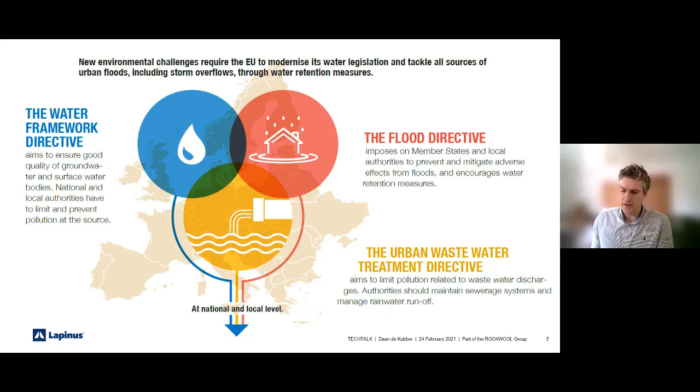So all in all, this framework of European legislation aims, for one, to make sure that water gets cleaner and cleaner, specifically looking at the groundwater and the surface water. Secondly, getting these waters cleaner requires preventing overflows from the sewer system towards the environment. And thirdly, you can prevent these overflows of the sewer system by preventing rainwater from coming into the dirty water sewer. So these three legislations give a very good framework of how we can handle this problem.

So how big is the problem? If I look at Denmark, then for sure there are a lot of overflows of the sewer systems. This map on the right is made with data from the Folketinget. It was published last year; I believe it's data from 2019. And I know the map is very much disputed because it's based on calculations and not on actual measurements of overflows. But it does indicate that the number of overflows is very substantial, and it's throughout the whole country. Maybe concentrated in Copenhagen if I look at the colors, but the problem basically is everywhere.

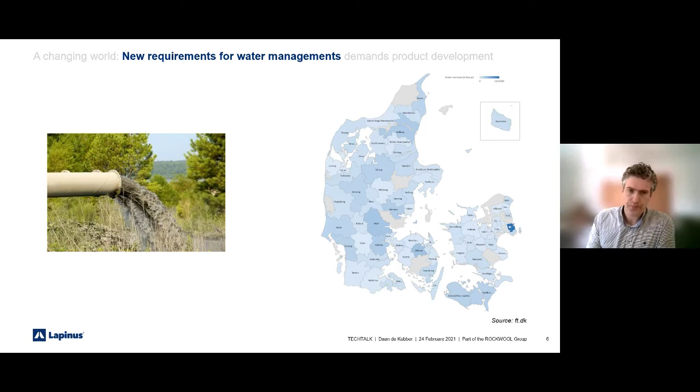So what should we do? One solution that has been traditionally used is to install pipes, big pipes, sewer pipes to capture all the dirt water and the rainwater, and then bring it to the wastewater treatment plant and get rid of it.

But we see with the bigger rains that you would need even bigger pipes than you already have. And then if you install a big pipe in one street, then the water going to the next street will be even more, so you need an even bigger pipe there. And it's a cascade of problems, and you would need ever bigger pipes.

This is both very expensive, almost prohibitively expensive, but next to that, you would also throw out all the water that you very well need inside the cities for the urban heat island effect, but also for the too little water problem, which can give in the end soil subsidence.

So we preach more to keep the water local, the rainwater local, capture it into systems, buffers, creeks, bodies, all kinds of SUDS systems. But then also we need to clean that water before it's sent to a recipient to make sure that we fulfill these demands or start fulfilling the demands of chemical and ecological quality.

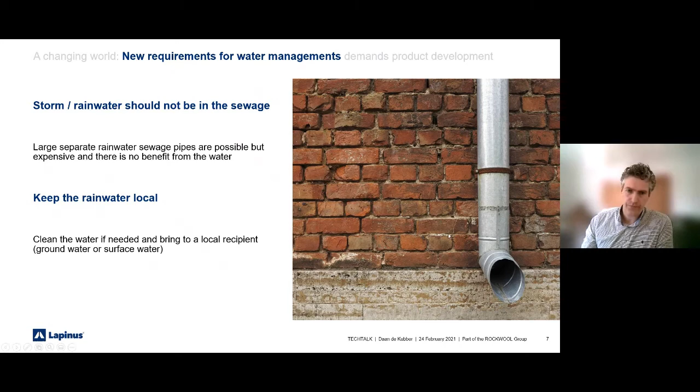So what kind of solutions could be used? First, on the left, we have the nature-based solutions, which I would say should always be preferred if possible. So having the water above ground has a lot of benefits, both in terms of costs. It's a very cheap solution, but also the water in the environment gives a lot of benefits for the people living there, for the green, but also for the aesthetical aspects.

Typically, you would have these kind of swales or wadis. And the water can be cleaned by the soil underneath. You have precipitation, of course, and you have a sand passage. Also in this category, I would say you have retention ponds that are used to clean rainwater already. I think these solutions are very effective and should be preferred, but in the urban setting, a lot of times you have space constraints, and you just don't have the space to use these nature-based solutions.

Then you have the buffer solutions, which basically is a very large area where you can store water under the ground. That can be typically parking lots, industrial areas, all kinds of areas. You have these large buffer solutions. From there, the rainwater that is collected in it can infiltrate in the ground if it's clean enough, or typically you would also have a delayed discharge towards the sewer.

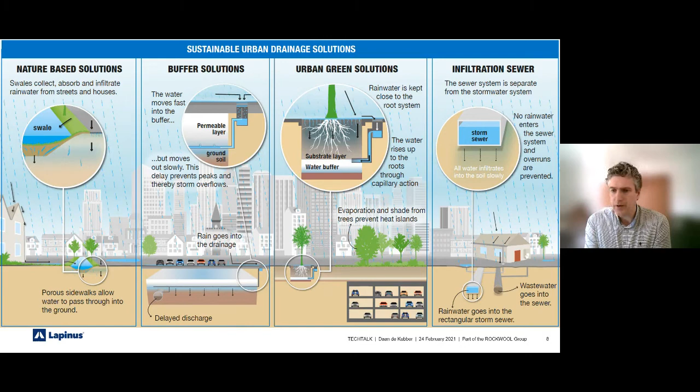Disadvantage of these systems is that you cannot store large amounts of water. So then you would have to combine it with one of the other systems. The last system where we as Rockflow work very much on is the stormwater sewer system. So it's a parallel system to the dirt water sewer. All the rainwater and the storm events, they can be stored very quickly into this stormwater sewer or infiltration sewer. And from there, it can infiltrate slowly into the ground, or again, if necessary, you could have a delayed discharge to the dirt water sewer system.

So what is Rockflow? We make elements of stone wool that you might know from the insulation, rock wool insulation. Visually, it looks very similar. In practice, it's very different: rock wool insulation is made to repel water. We have made Rockflow to absorb water, and it can do that very efficiently. We can absorb up to 95% of the volume of a stone wool block of water, and keep that there until the surroundings are ready to take up water again.

We don't have any loss, or minimal loss, of urban space, I would say. We can install the Rockflow systems under streets, under parking lots, so the city above the system can just continue to run. It's a very flexible design. The stone wool can be cut very easily with simple tools into all kinds of shapes, and by that we can very easily work around all the pipes and cables that are existing in the subsoil. It's a sustainable material. The stone wool is made of volcanic rock, typically basalt, diabase.

So the earth can produce much more of this rock, or is producing much more of this rock than we will ever be able to consume. So in that way, it's a very sustainable raw material. Of course, we still use a lot of energy to melt the stone and make it into stone wool.

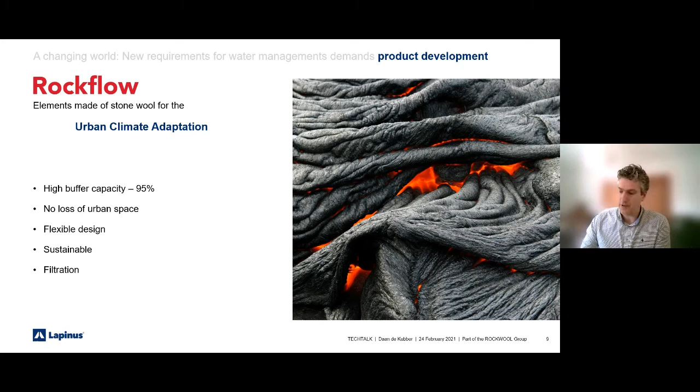Rockflow, where have we installed it? We have installed over 160 projects over the last 3 years, I would say. We started in the Netherlands, where I'm from myself, so we have a very dense network of projects there already. Anders, also present in this talk, has been active in Denmark doing a number of projects there. And we've also done some excursions to Sweden and Norway so far.

The projects are really different in size and application. In the upper right corner you see a vejbed, which is a smaller application inside the city of Copenhagen, I believe in this case. We have projects like large buffers in the middle, where there's a couple of hundred cubic meters installed in one area. And in the lower right corner you see an example of this rainwater sewer, where the rain of a complete neighborhood is collected under the street.

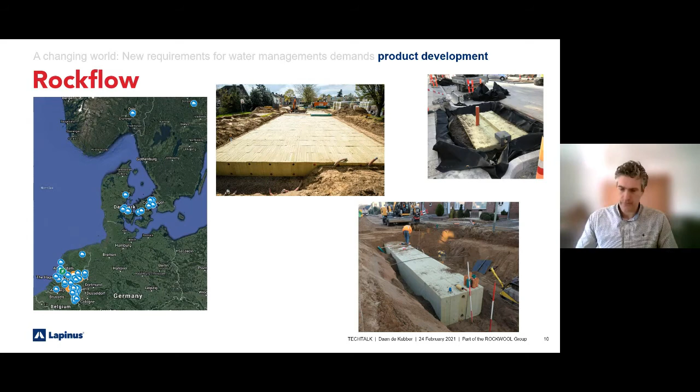The system is running parallel to the dirty water sewer. It's not visible anymore in this picture, it's just a little bit lower below ground. But a system like this, Rockflow, is running over 3 kilometers now in this one city. So very different kinds of projects that we have.

To prevent this, to remediate this, we need to make sure that all the water that is running from the city into this lake is cleaned of all the copper and zinc coming from the roofs, all the fertilizers that we've put on the lawn, all the fertilizers that come down with the rain due to evaporation somewhere else. So it's important to clean this water running into the lake, to make sure that in time the quality of the water in the lake itself is also improved.

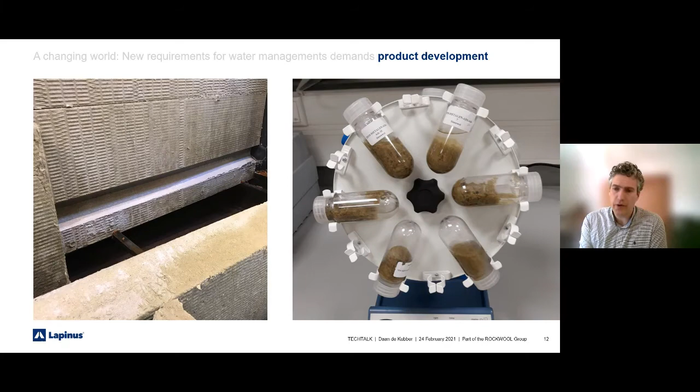And the chemical and biological oxygen demand, which is a measure for the amount of organics that we take out. There we also see a very large decrease of the COD, BOD in the effluent. Total phosphorus, we're also quite efficient in taking it out, and that is because phosphates and all the structures that phosphate is part of typically tend to absorb to the suspended solids. So if you take out suspended solids, you already take out a lot of the phosphates.

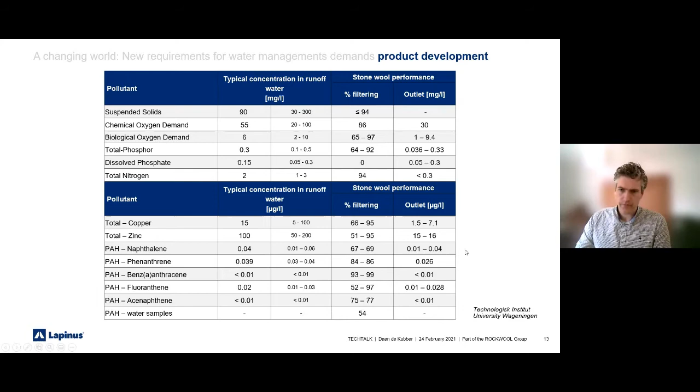Now, one of those field tests, this is the project in Aarhus. It was code-named Underground. And it was installed in 2016 with the help of the MUDP program, a subsidizing program. The idea here was to see if we can take these principles of filtration of stone wool and see if we can clean the water quality to a level equal to the present BAT.

And the best available technology at this moment is the retention ponds that are used. They take up a lot of space, which would not be possible in this area in Aarhus, but they are very efficient in cleaning the water.

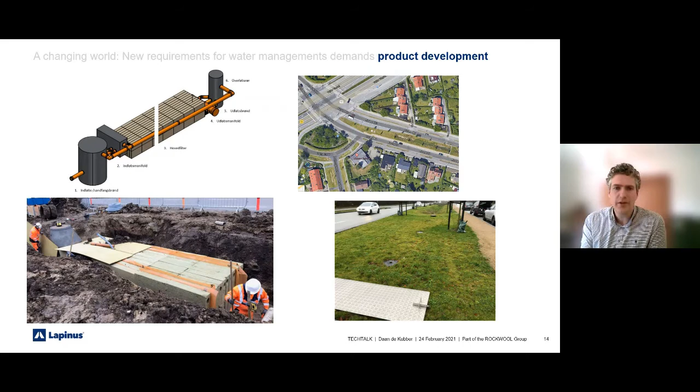So of course on the system, as we had the intention to see if we are better than BAT or comparable to BAT, we did a lot of measurements and compared them to the documented performance of the best available technology, the retention pond.

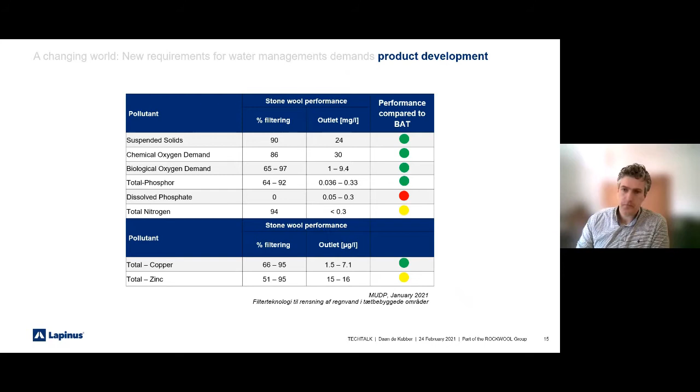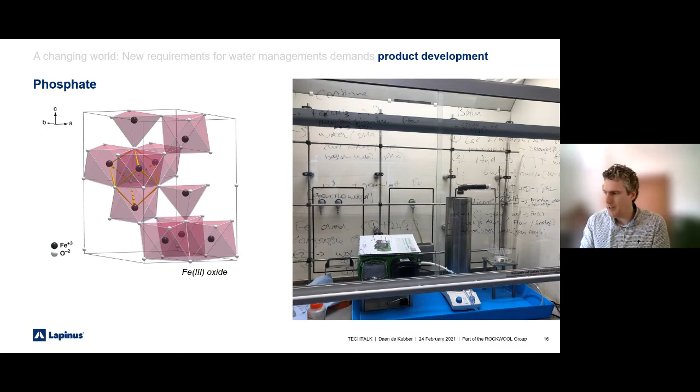Then, luckily, we were able to talk to Ole Larsen, who most of you will probably know, also part of the DNNK network. And he brought us on the track of looking at iron oxides. The first questions that we try to answer together with Ole Larsen is, can we grow iron oxides on the wool, and by that have a huge increase in surface area, and can this iron oxide in the wool also capture phosphates? So that has been the topic of investigation for the last half year, I would say.

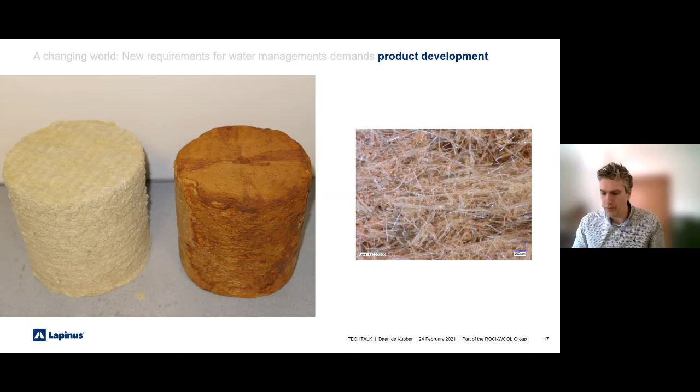And the iron coating is through and through, and that you can see on the right hand side, the microscopic picture, where all the glassy fibers are actually stone wool fibers, and now the pink reddish dots are iron oxide grown on top of the fibers. And this has increased the surface area of the samples enormously. We don't have results of our own laboratory yet, which we are gathering as we speak. I believe our laborant is measuring phosphate concentrations today.

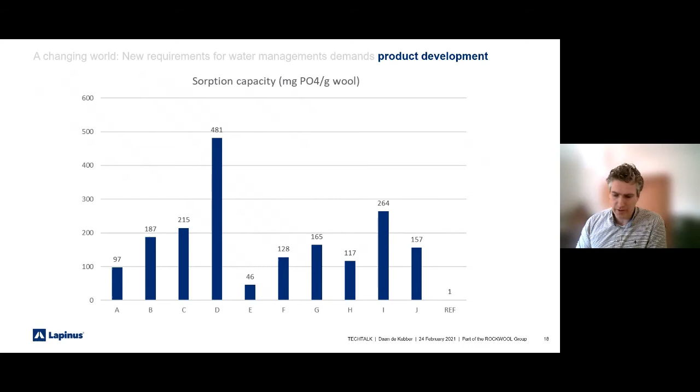So what are the next steps for us? First of all, making a sample in the lab is very different than making it full scale. Rock wool production lines produce maybe 10,000 kilograms of stone wool per hour, and having an iron oxide coating process in that production process will be a big challenge. So of course that is one of the things that we look at very much at this moment. How can we mimic, or how can we copy this production process in real life? Then secondly, what is the sorption efficiency of those phosphates? If we have those two answers, we could come with, let's say, a preliminary product that we can start testing.

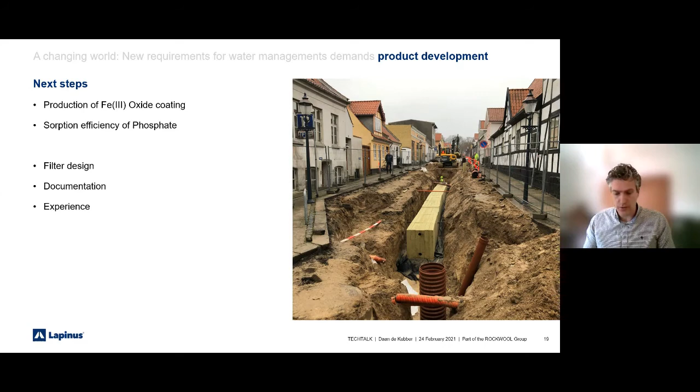Next to that, we need documentation. Of course, we need to show with data from labs, but also from real life, how we can capture this phosphate. Maybe there are also other components we will look at in the future. And then last but not least, experience. We need to build up experience before we get to a real commercial product.

So getting back to the larger perspective, what we want to do as Rockflow is provide tools for the people in the market to handle this urban climate adaptation. We see there are ways to address the too much, the too little, and the too hot aspects of urban climate adaptation within the space constraints of a city and within the sustainability aspects that are set. We want to have a minimal negative impact.

That is also, of course, why within our production we are looking at carbon zero based production methods, but we also want to maximize our positive impact on the environment. I hope with the developments that we have been doing in the past and are doing at this moment, we can contribute to the challenges that we see in the urban climate adaptation.